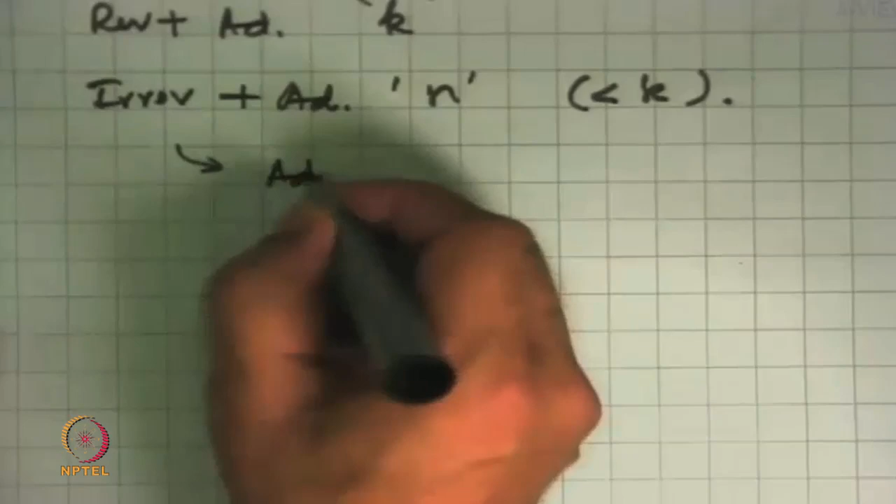If you are cooling it, then n will come down even more. So for engines and compressors and things like that, n is less than k, which, if you do a complete analysis, will show you is not a very good thing, because that's not the best efficiency, best way to do that compression. So people try to make things as adiabatic as possible.

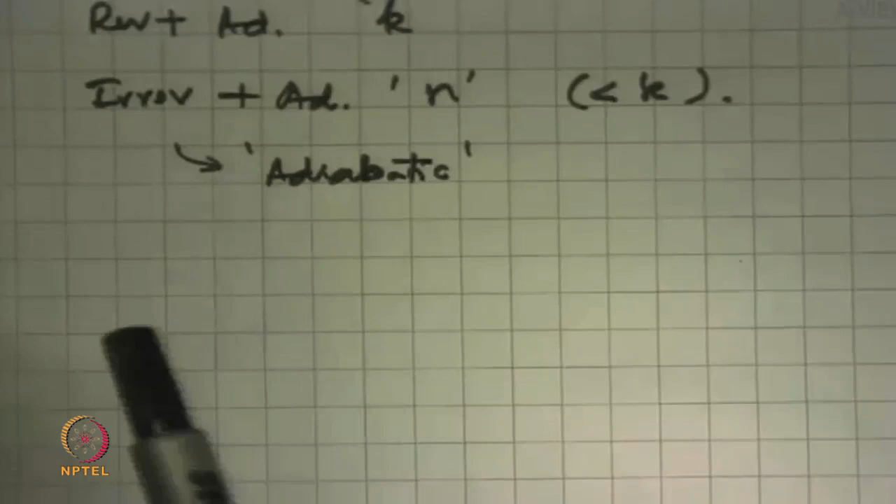A lot of work has gone on in saying, can I make an internal combustion engine where the cylinder piston arrangement is adiabatic? Right now it is not. When you look at a motorcycle engine, it has got fins on it, so whatever heat was generated by the burning of the fuel, some of that was conducted to the atmosphere through the piston and the fins, and the rest of it you got some work out of.

So by burning fuel, you lost some energy to the atmosphere, and that was not the best thing to do. So I make it adiabatic by putting a lot of insulation on it, fine, but then the material will run much hotter. It will get very hot, and materials like aluminum or aluminum alloys may not be able to withstand that type of temperature. They may lose their strength, their ductility, their wear and tear may happen, the lubricating oils may get burnt up or destroyed, and so the engine may not be a very long-lasting engine. But that is definitely a thermodynamic basis and the reason why you would like to make such a process adiabatic.

Could you please explain the importance of Gibbs energy? I have deliberately not gone too much into detail on that, but Gibbs energy basically tells you that, for instance, in a chemical reaction, we know that we get so much heat out of it. The question is, if instead of taking that out as heat, what if, is it possible to get work out of it instead? That is what Gibbs free energy tells us, that is the maximum work that we can get from a particular process.

In the case of non-reacting systems, it has got a slightly different connotation, but it essentially is still saying that it is the maximum work that you can get without interaction with the surroundings. That's very roughly what Gibbs free energy is about.

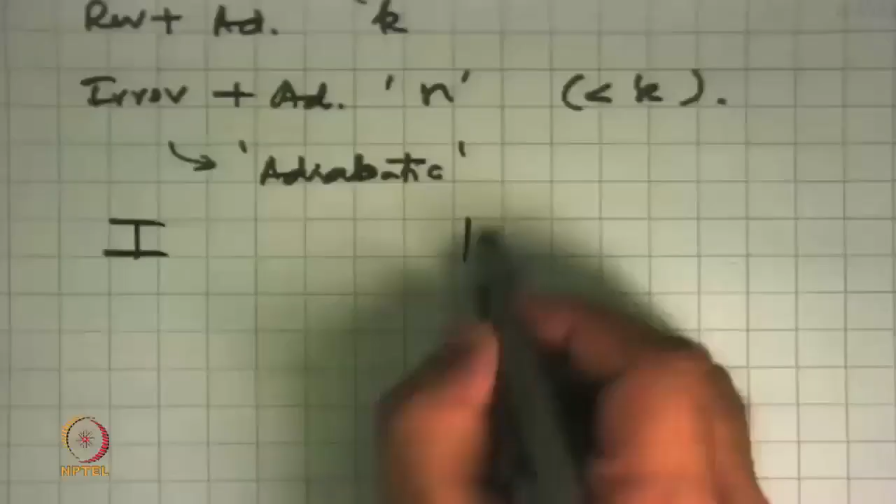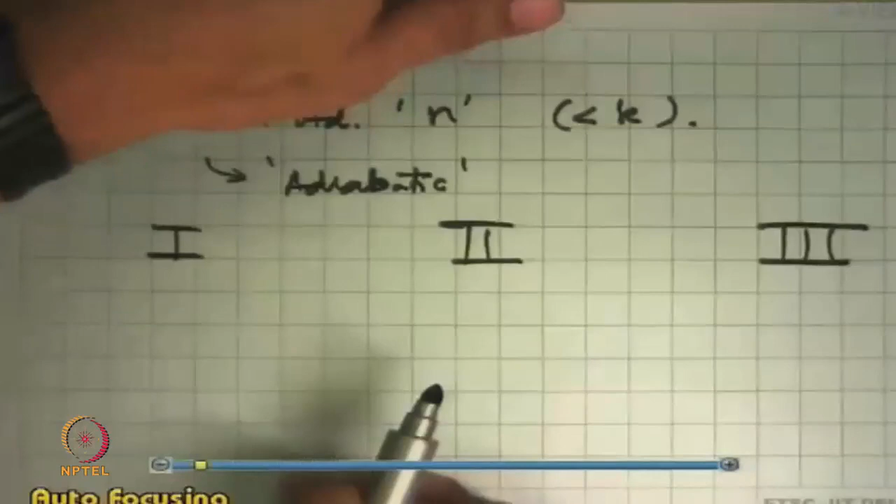So what we have done in this course, we have 3 modules so far, and now we have covered all the knowledge that we want to solve a problem. We have everything. Whichever problem, whatever way it is, now that is not an issue for us. We know how to do a first cut analysis of all these types of problems. In the first one, we said we have to worry about concepts and definitions.

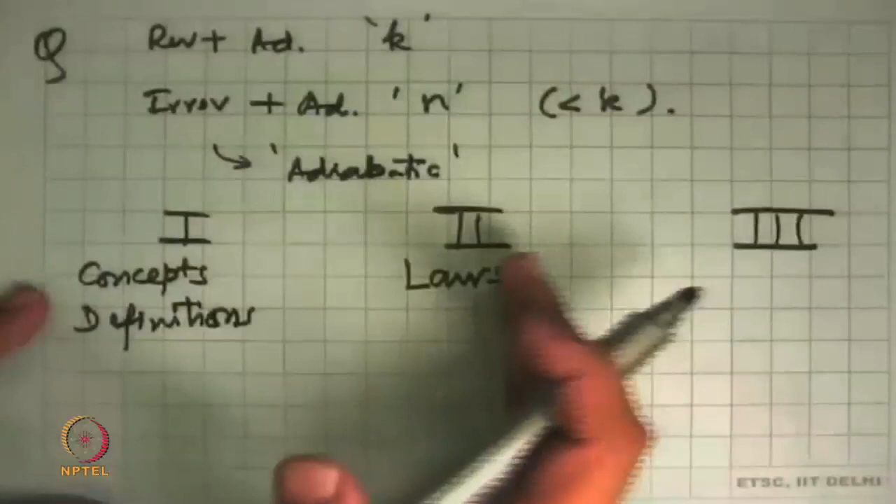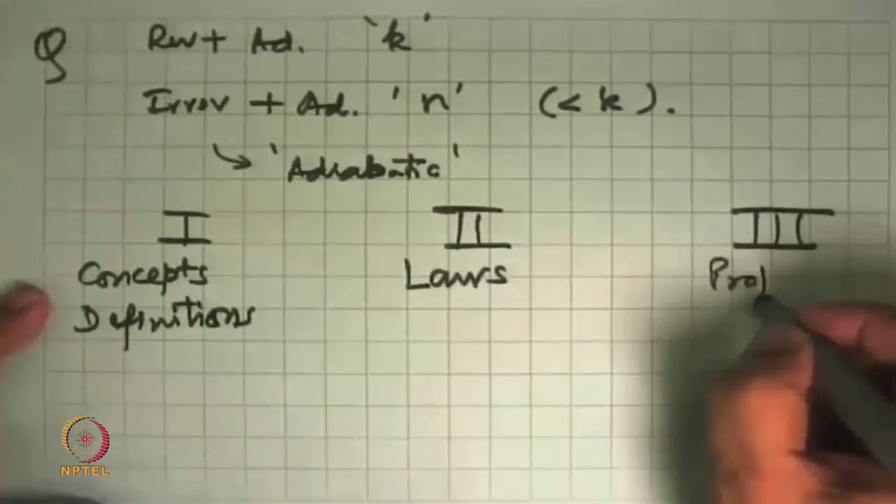In the second, we said what are the laws, and what we learned was universally true. There were no ifs and buts, it did not depend on the application or the examples. Now we've looked at calculations of changes in properties, and learned how to compute and calculate the properties of a pure substance. So all of these together now give us the confidence that we can completely solve a problem and answer various questions.

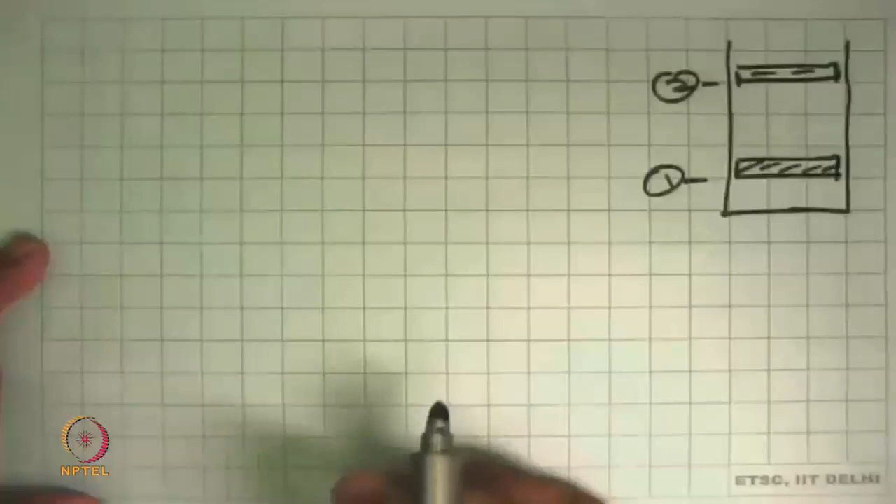So let's take a couple of examples. We have a cylinder piston arrangement in which the piston moves from this position to this position. These are state 1 and state 2. There is some material, some substance in it. And during this process, a certain amount of heat was given to it.

And we want to calculate what is the work done by the device. So we know now, we start off the way we did in the beginning, that we identify the system boundary is what we draw first, and say whether it is an open system or a closed system.

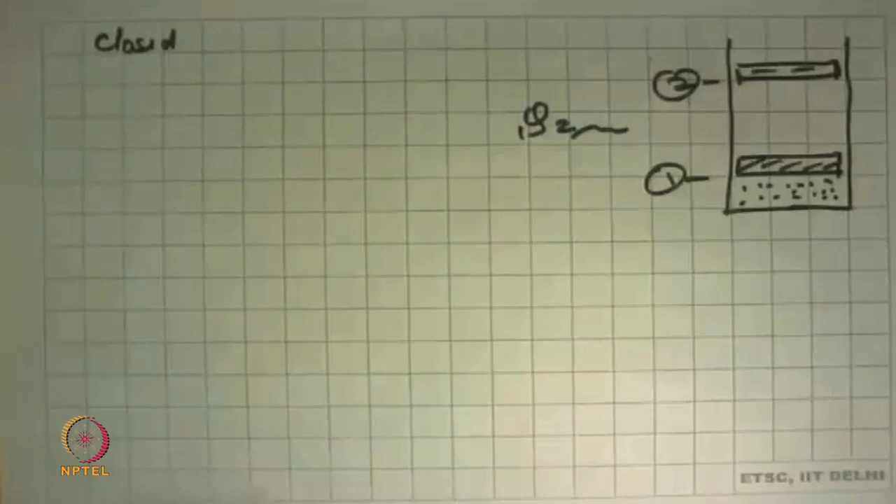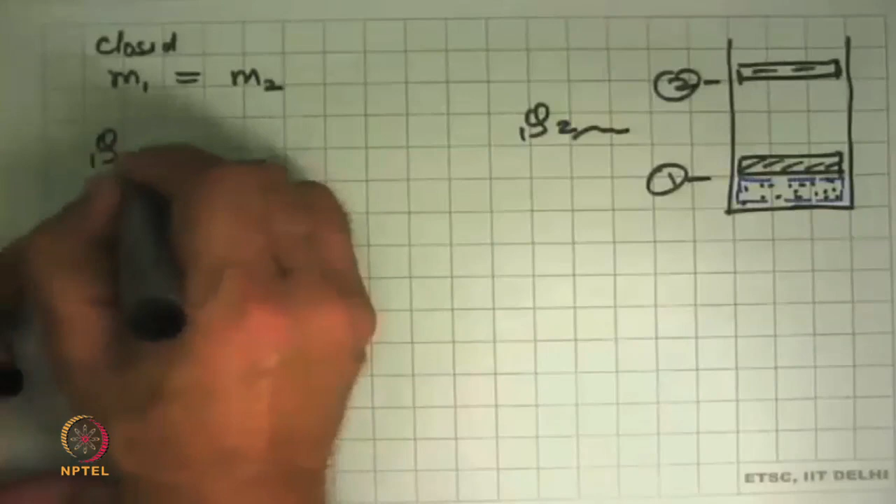And we say this is a closed system, so mass of what is there inside this is constant. That means mass in state 1 is equal to mass in state 2, conservation of mass. And the first law tells us that Q12 is equal to W12 plus E2 minus E1. Then we make some assumptions of delta KE, delta PE being 0. And that gives us Q12 is equal to W12 plus U2 minus U1.

So we need to calculate various things, and we then write down what is given in the problem. Say state 1 is fully defined, that P1 is given and V1 is given, and say mass could be given, which means specific volume at the beginning is known. And we say at state 1, I have two independent properties, so I can get enthalpy, entropy, everything else that I want.

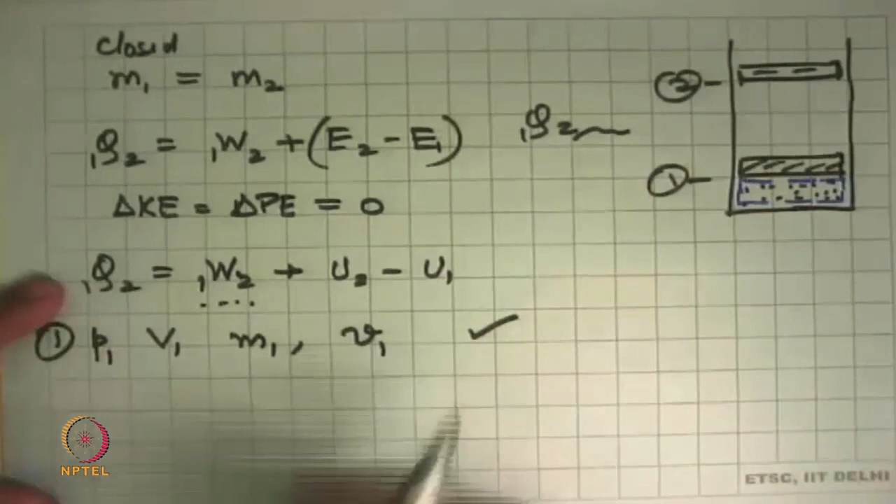And now it depends what's with state 2. We know that if it went up there, the mass was the same, M1 equal to M2, the volume increased by double or triple or quadruple, whatever, specific volume change we know, but say we don't know what the final pressure is. If we are given the final pressure, P2, then we know both things, or say T2, and we know that state 2 is defined. We can get U1, U2, and if heat transfer during the process was known, the work for this process can be calculated.

And what one does then, at this point, is what we had not done so far in our problem solving: say, what is the substance? Having learned the properties of the pure substance, we now have to make a decision. Should I assume this to be a vapor and go to the tables and charts, or should I assume this to be an ideal gas and use PV equal to RT?

This is an important decision we have to make. And for that, we need to look at the problem and say, well, what is it that is given here? This could be superheated vapor, in which case your first idea should be that I must treat it as a vapor. Let me not assume a priori that this is a gas. At the end, I will check again if it is a gas, that's good enough. Or if I don't have enough other information, I may assume this to be a gas and find out what.

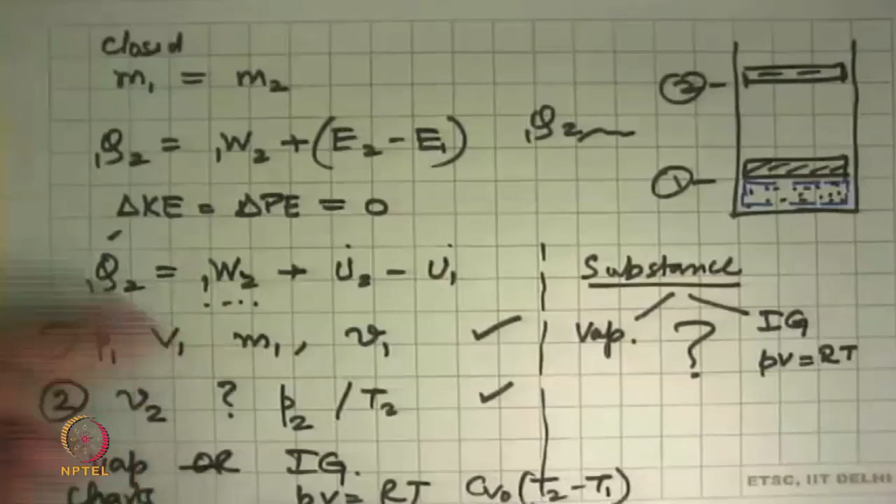Or from the charts, we directly read out the two values, and if values of U are not given, you would definitely have values of H which would have been given. So we can get H2 and H1 from the charts. P1, V1, P2, V2 are known, and from there we can get U2 and U1 and substitute in this equation. And then we do the remaining calculation.

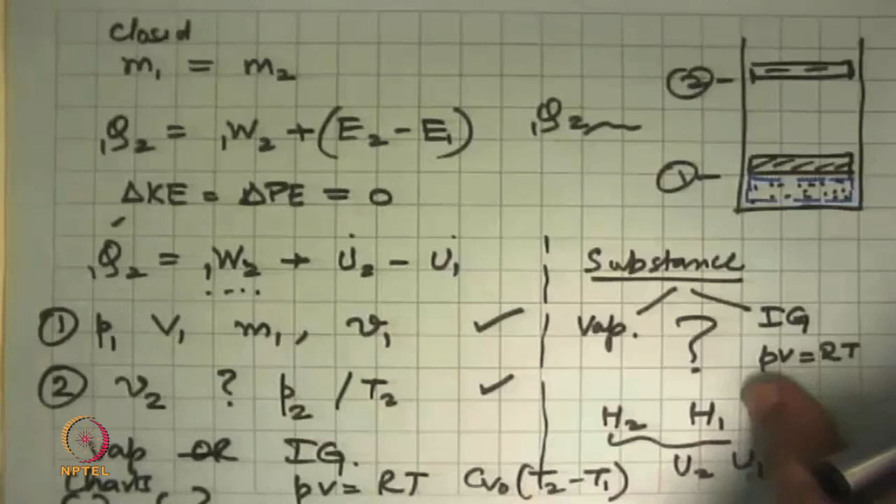So this is the additional thing we have put, and in doing that, we are now actually putting numbers on all of these. And that is where we are getting quantitative and getting numbers. So we did not do that at the end of module 2. We just said that I knew the property and we gave some arbitrary symbol to that property. Now what we will do is go back and put numbers on that property, put a title or a name on the substance and solve those problems. That's what we will do now.

We can also use these properties to do various checks and balances and say, take an open system. And so somebody says that I have made an adiabatic plus reversible turbine that can expand from P1 T1 state to P2 T2 state and produce this much amount of work, or this, or W. And the first question we ask, is such a machine possible?

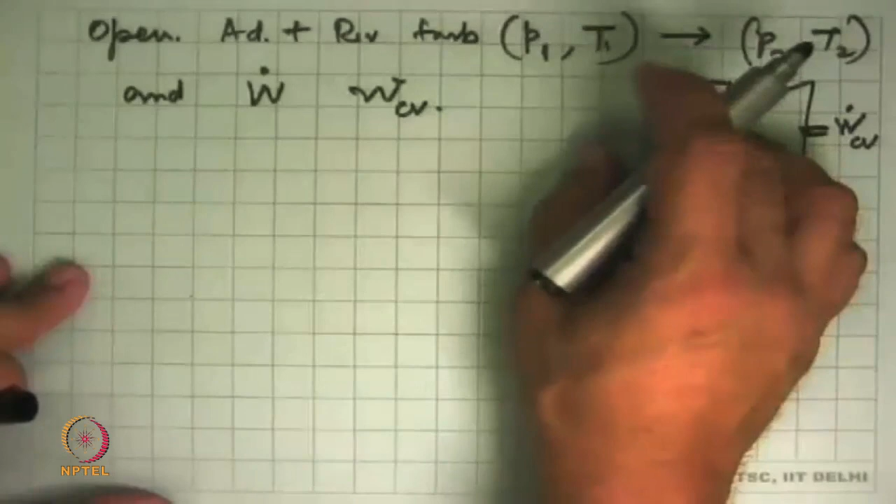And now, say, well, the problem would tell you that gas expands in a turbine, and that automatically tells you that word gas, that you can take it to be an ideal gas. Or if we say it is steam expands in a turbine, then by default, we presume it is not an ideal gas. So that question will get answered, vapor or ideal gas.

And then we draw the process on a property chart and say, well, this is state 1, they have given this, and this is state 2, or maybe state 2 could be there, or state 2 could be there. We don't know. And if we plot it, we can very quickly see one thing, that on this plot, this exit state, this is the isentropic case.

If the final state is to the right of this, the turbine is possible. If the final state is to the left of this and it is adiabatic, the turbine is not possible.

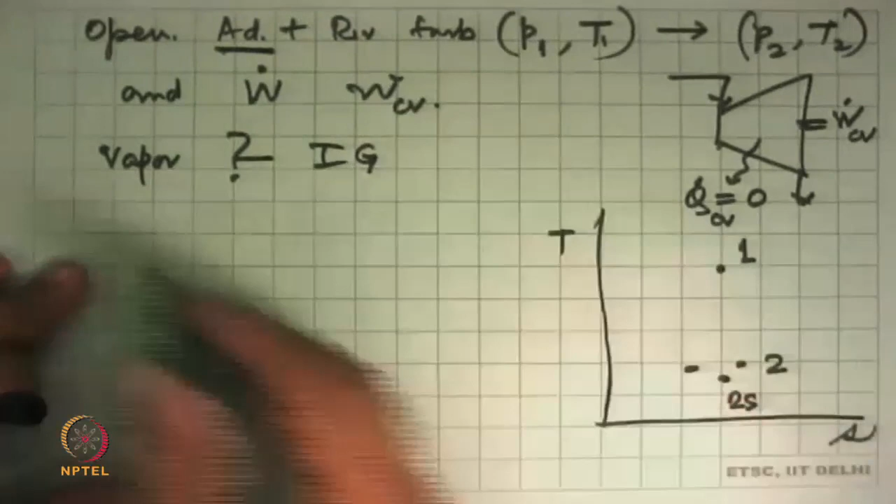So what we have done is we went and said, well, I will calculate S1, we will calculate S2 and ask, is S2 greater than S1 or equal to S1? If yes, turbine is possible. No, turbine is not possible.

The work that is claimed, it may be right by the first law analysis that this work would have been m dot, or m dot is 1, H2 minus H1. And this came from a series of assumptions that we have done. So this may be true, it is getting that much work. But if S2 is not greater than S1, then even though it satisfies the first law, it says no, this is not possible. You cannot make such a thing.

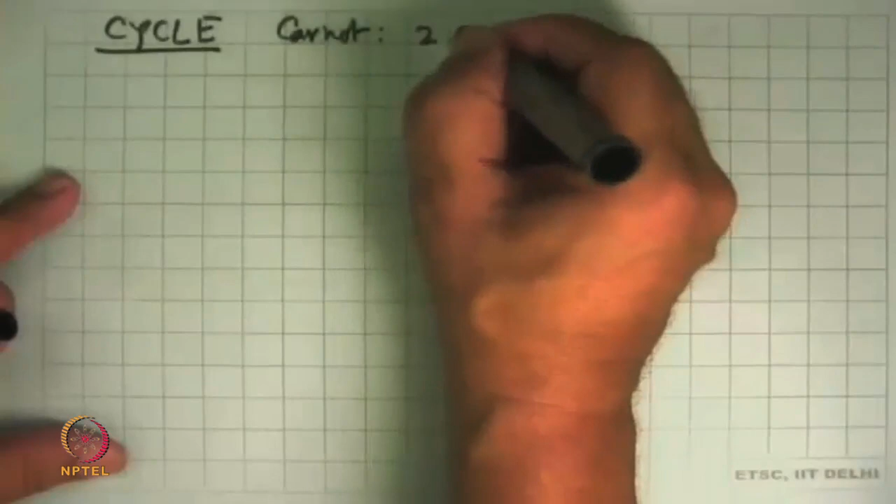We'll take one more example and then we'll stop. We will look at analysis of a cycle. And what we have learned now is that a Carnot cycle has 2 isothermal heat transfer processes and 2 adiabatic reversible work producing processes.

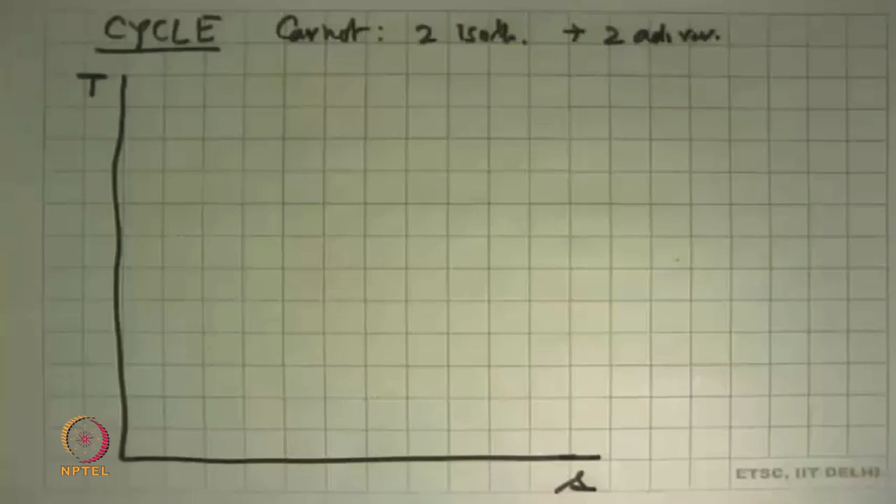And now we say what constitutes, in the real world for a given substance on this TS diagram, a Carnot cycle? So what we do is we just say that here is the saturation dome, and we know from what we saw yesterday on the TS diagram that even at very high pressures, this line goes very close to it and it goes like that.

That means to the left of this, states are not possible. All the states are to the right of this. And if this is what the Carnot cycle is, what it tells us is that any square or a rectangle is a Carnot cycle.

If it goes this way, it's a work producing cycle. If it goes the opposite side, it's a heat pump or a refrigerator. So it has 4 states: 1, 2, 3, 4. We want to know what is the work done per cycle. So we need to know the cyclic integral of heat or the cyclic integral of work, and that will be the answer.

So a cycle could be there on this property diagram. Now we are putting numbers. Nothing stops us from saying that I have a Carnot cycle sitting over there. Perfectly fine.

Somebody says I'll make a Carnot cycle like this. Theoretically, absolutely no problem. Practically, we start seeing some problems.

It is now gone into the wet region, and as far as work producing or work consuming devices go, so W type devices, turbines, compressors, or anything, there is one fundamental principle of engineering: this will either be a liquid or it will be completely a vapor or ideal gas. It will not be a wet state.

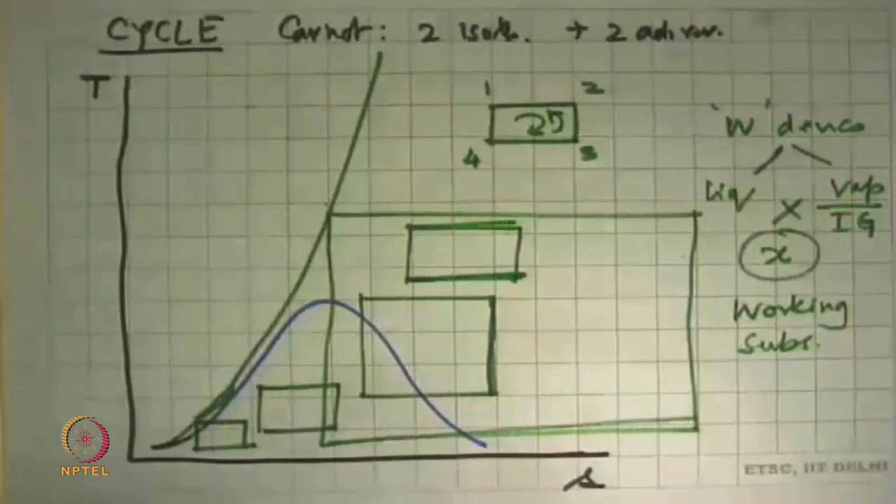Theoretically, all of them are possible. The efficiencies, we can see what they are. Practically, if we start putting numbers on it after selecting the material, so we select the working substance and start looking at what numbers come out for specific volume, enthalpy changes, and things like that, then we will see that there's a big problem. Something is possible, something is not possible.

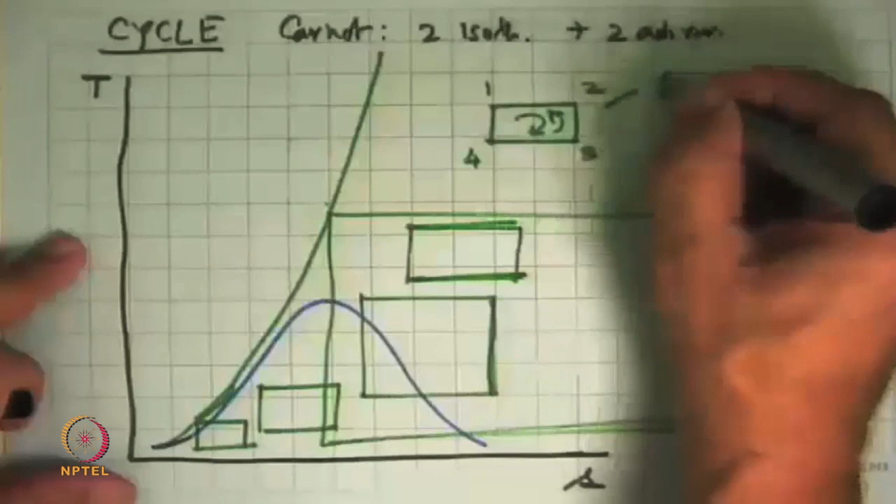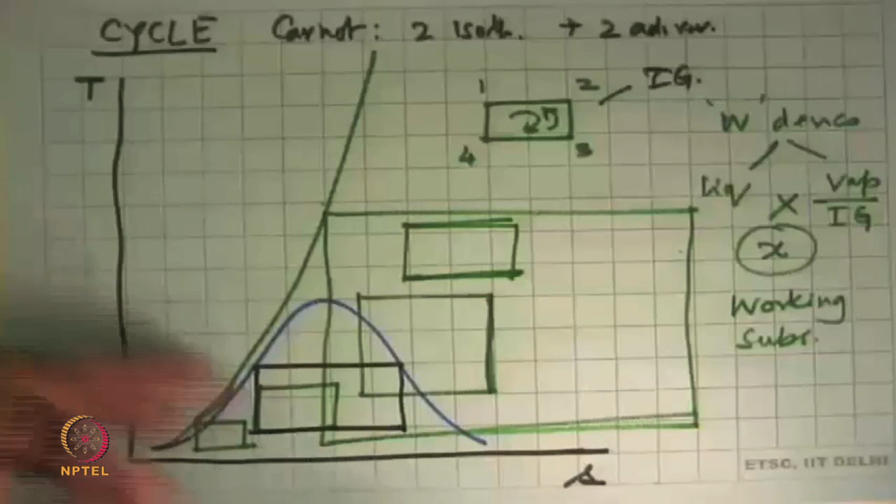A Carnot cycle far away from this dome, like this one that I have drawn, is completely an ideal gas thing, quite nice and easy to look at. A cycle which could be like this would also be a Carnot cycle, somewhat possible, but it still has problems with it. This one will be a vapor thing, this will be only an ideal gas cycle.

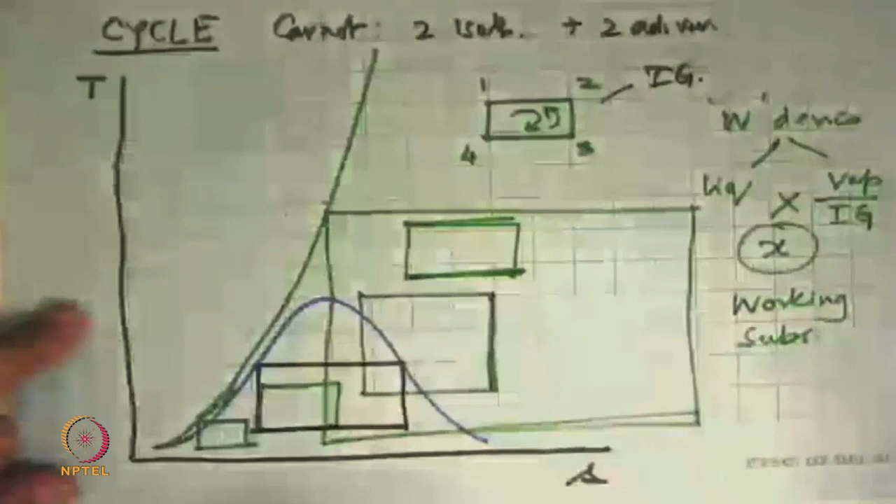So when we have 4 such states, how do we do the cycle analysis? For that we need 2 independent properties at every point. Let's see what happens in this case. What I do is make a little matrix.

On this side I put the state numbers 1, 2, 3, 4, and on this side properties P, T, V, H, and S.

So how many properties do I need to know to define the Carnot cycle? One is of course T1 and say T4. So I say I have specified this, and I have specified T4. And then say, other pressure at the other 2 states, I need something more, and let's take that we know the pressure in both cases.

Question is, do I have enough information to complete this table, which means do I have 2 independent properties at every state? Let's quickly go through this.

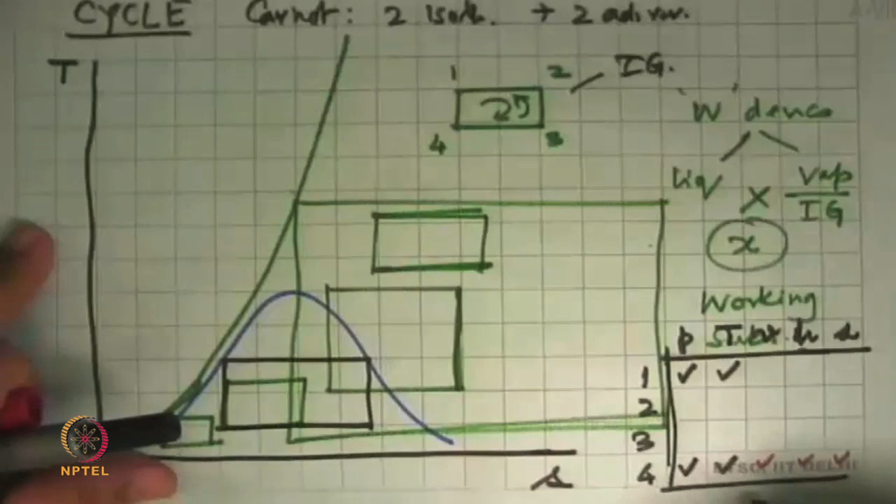Say if state 4 is fully defined, then I can compute V, H, and S. And I know from this that S4 is equal to S1. So if this is known, then this is known. The 2 are the same.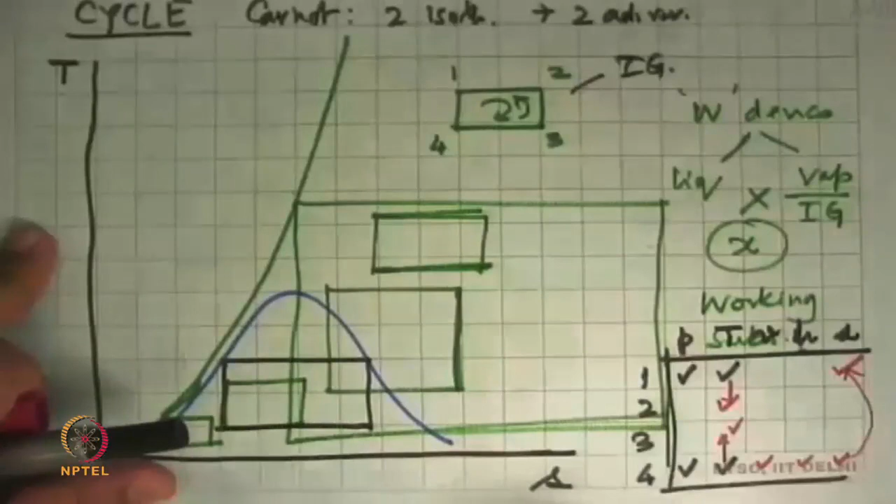And then we look at this thing and say, if I know T1, do I know T2? The answer is yes, this is the same T2. And from here we know that T3 is same as this, so this T is also known. So now we have got 2 independent properties, one at each of these states.

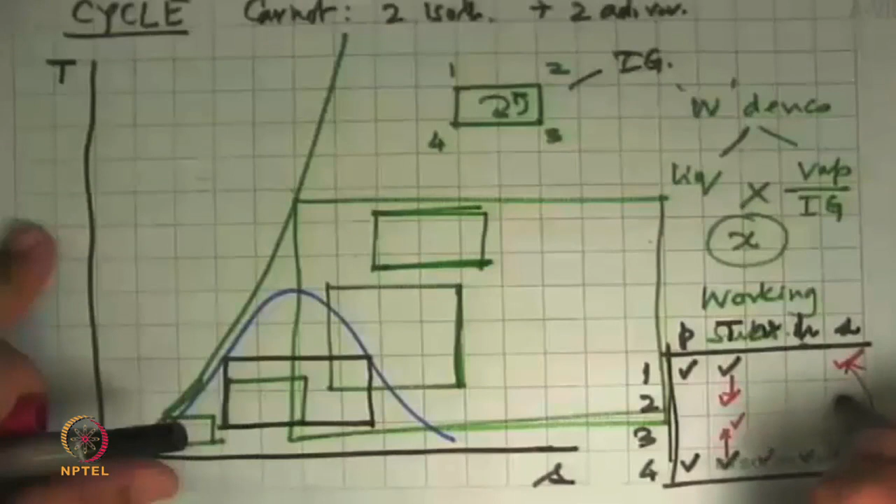And we ask, what do I know about 2 and 3? The entropy is the same. So if I get entropy at any one of these, which is, say, if I know one of the properties, then this is there, and then this comes out.

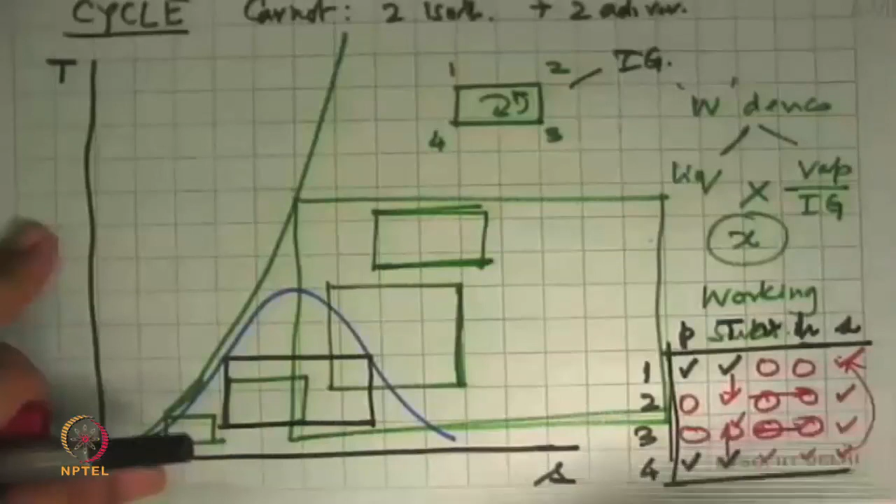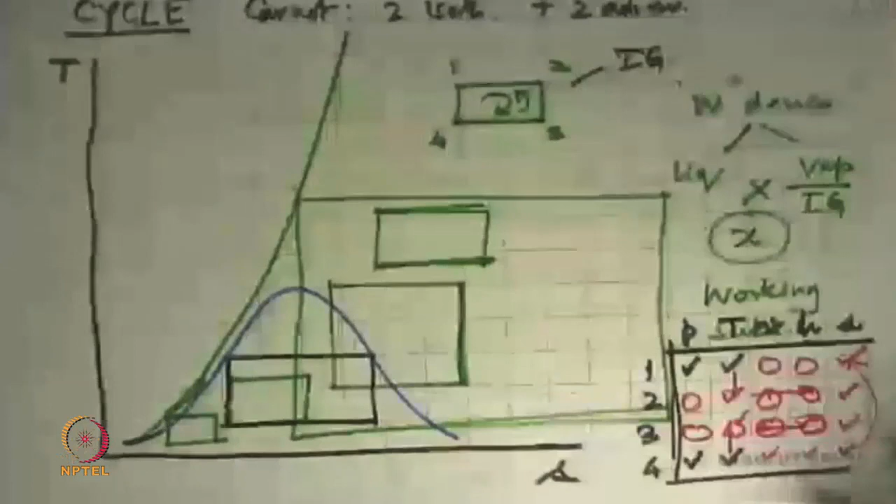And like that, we can complete this table and say that S1 is equal to S4. So entropy we have already taken, S2 equal to S3, T4 equal to T3, and T2 equal to T1. With that, you can see that if we get two independent properties at any point, the rest of the entries in this table we can very quickly complete, whether it is a vapor or an ideal gas. Once done, even if we don't need all properties at all points, specific volume may not even be needed, we can go back and calculate all the other things the law requires, that work is equal to the cyclic integral of heat, this property minus that property minus this property, and we can calculate all of that.

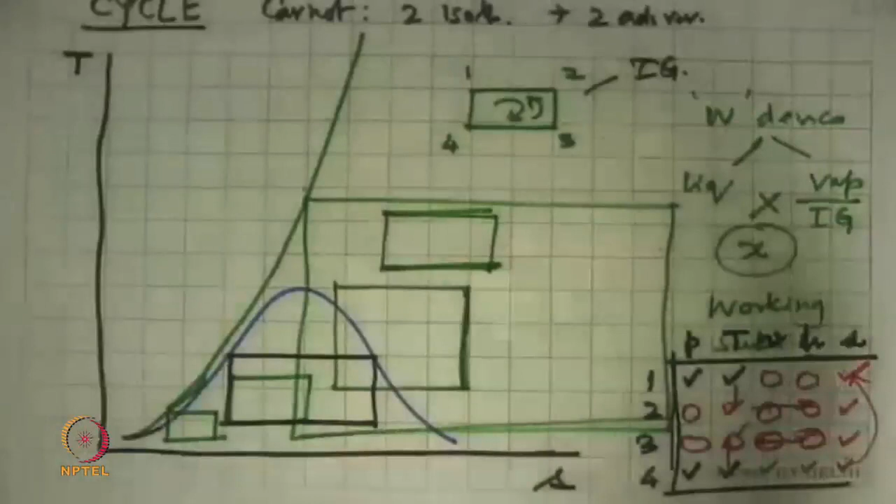So this is one way we can tackle cycles, by making a matrix and asking ourselves, in the problem, not necessarily in the numbers but in the words, do I have enough information that I can calculate two properties at every state? If the answer is yes, then it is possible to solve the problem. Then we go ahead and solve it.

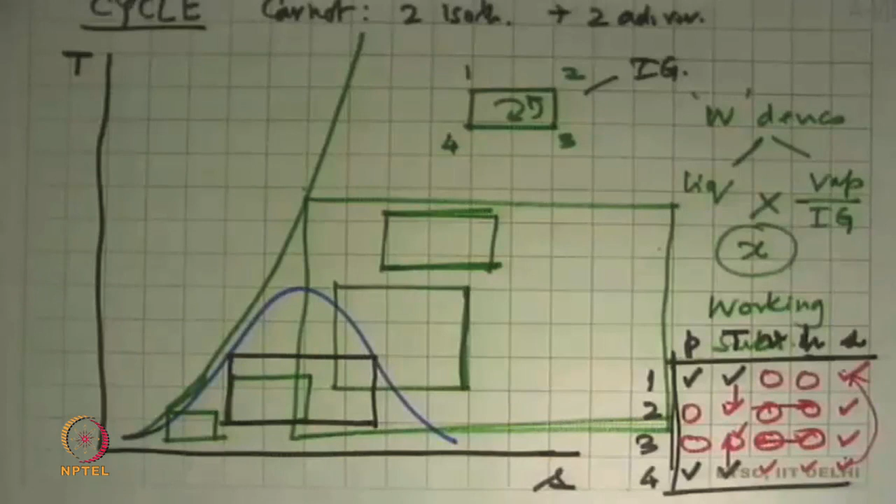Okay, what is the question between nozzle and diffuser? Okay, I'll take that up. So there are two devices, a nozzle and a diffuser.

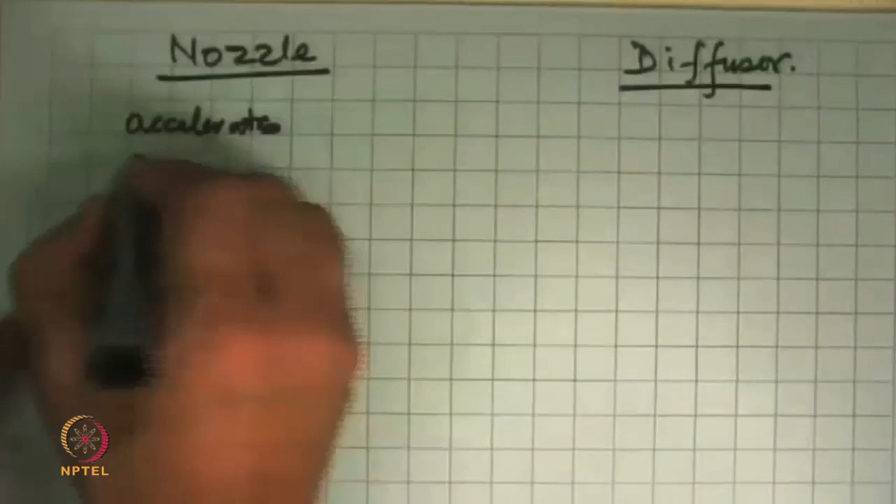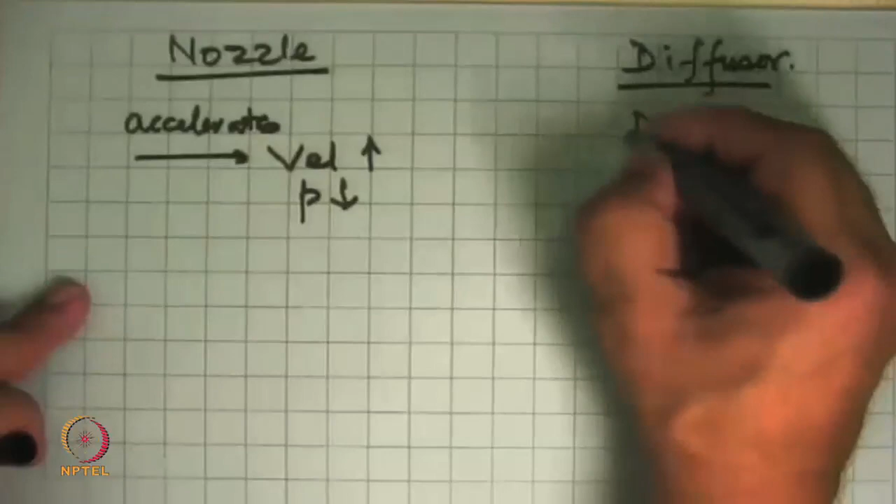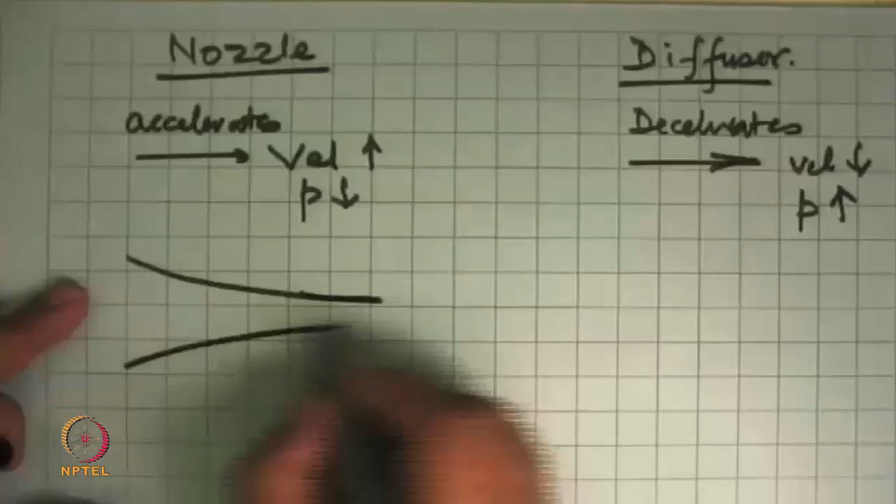Now this is a device which accelerates a flow. That means in the direction of flow, the velocity increases, pressure decreases. The diffuser is exactly the opposite; it decelerates the flow, so velocity decreases and pressure increases. So if you look at air going through a passage like this, here the pressure is P1, T1, and it goes through and comes out at a higher velocity. The pressure here has become P2, T2. The velocity V2 is much greater, or greater than V1, and P1 is less than P2. So this is a nozzle, with one little caution: those of you who have studied compressible flow realize this is true if everywhere in this passage the Mach number is less than 1, it is subsonic flow.

Now if you just reverse everything, we get a diffuser. You send in here at P1, T1 and some velocity V1, and what you get here is P2, which is greater than P1, and V2 is less than V1.

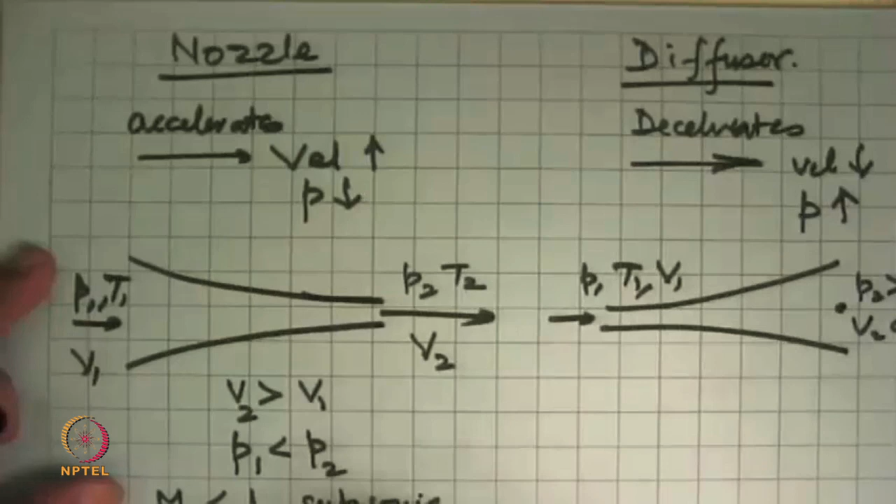And where do you see these types of things? If you recall the rocket that I showed you, the PSLV being launched, at the bottom of the rocket you could have seen a structure like this, from which gases were coming out. This is a nozzle. We produced high temperature gas, then accelerated it to make it high velocity by dropping the temperature, and then got it out here so that pressure increases, and there is pressure acting on this which pushes the rocket up. So nozzles are required in those rockets.

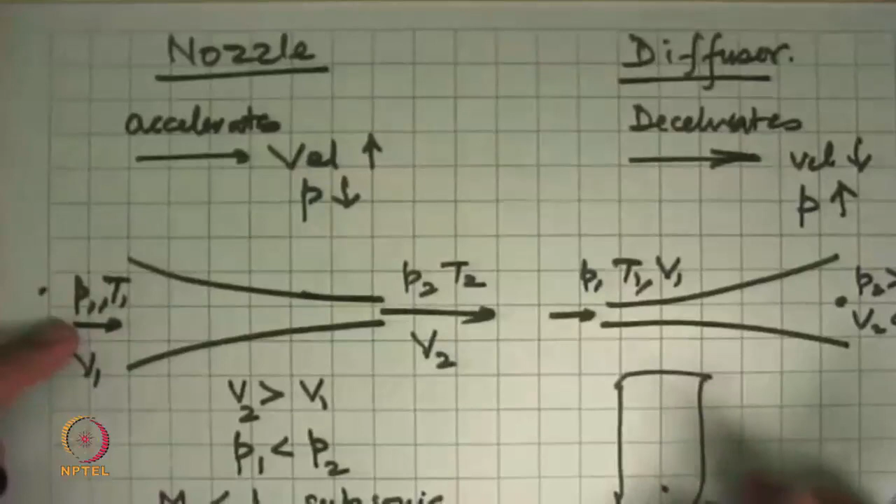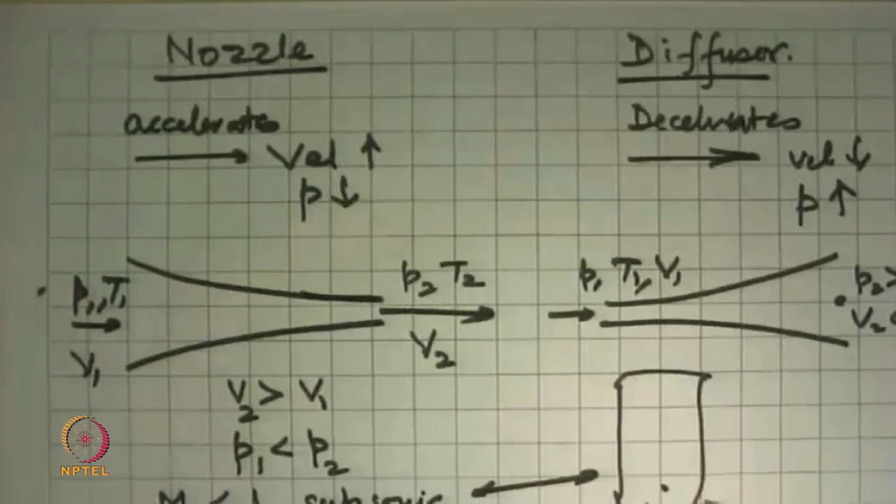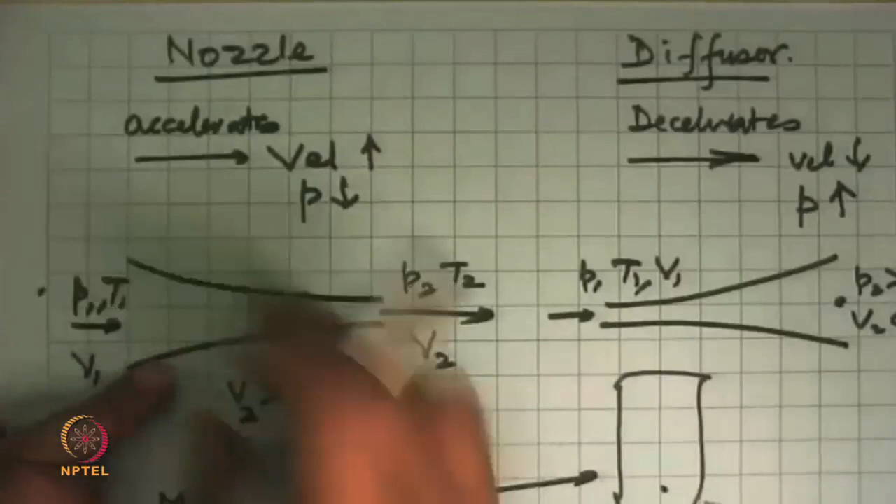Like before, this will happen if the flow everywhere is subsonic. The reason for putting this is that if the flow were the other extreme, Mach number greater than 1, which is supersonic flow, then exactly the opposite will happen in this passage and in that passage. This will decelerate the flow, this will accelerate the flow. But that's for a different type and a different course; right now we are not going into that, but just for completion of the description of a nozzle and diffuser, I have shown this.

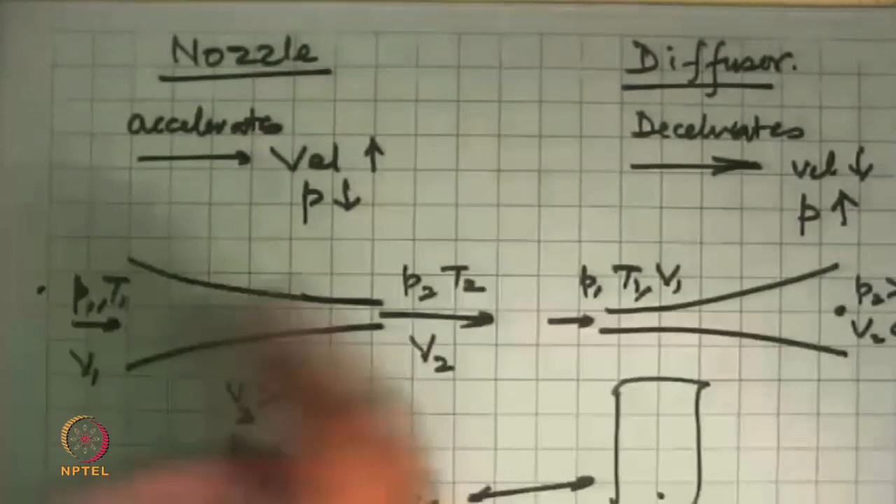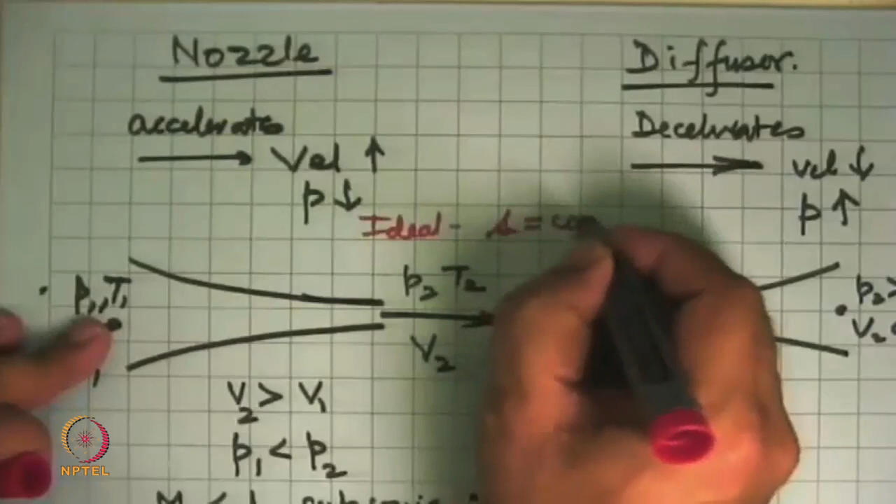In both cases, if there is no other dissipation and no heat transfer, ideally both would be isentropic, S equal to constant. If there were irreversibilities, exit entropy will be more than inlet entropy, and on the property diagram, say the TS diagram, the ideal nozzle will look like this, and the real nozzle, at the same pressure, will do this. For a diffuser, from here, the ideal diffuser will go over there, while the real diffuser will go there, and this will be the exit state.

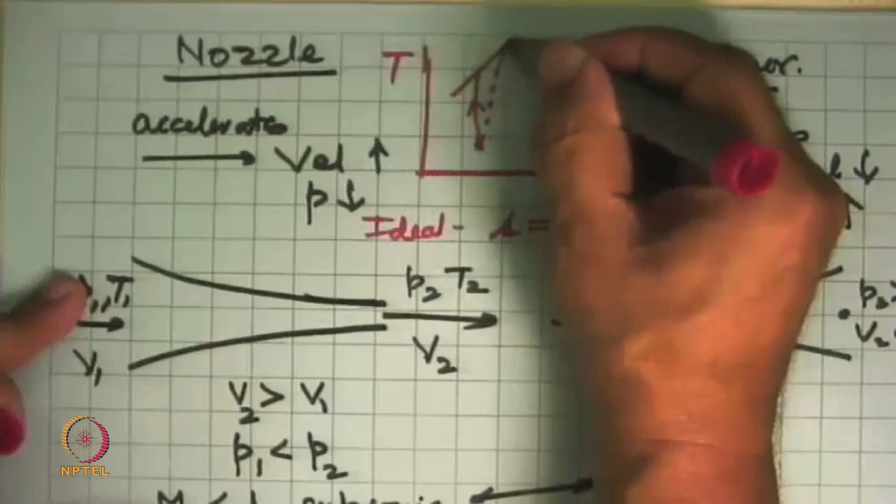Okay, so we will conclude at that point. We have now got all the theory, the properties and the laws cleared up, and we have already attempted a certain systematic way of solving problems. In the last module we will come with applications and solve some problems during the lectures. If you want some particular problems addressed, please post it on the forum, and I will address that in the last module.